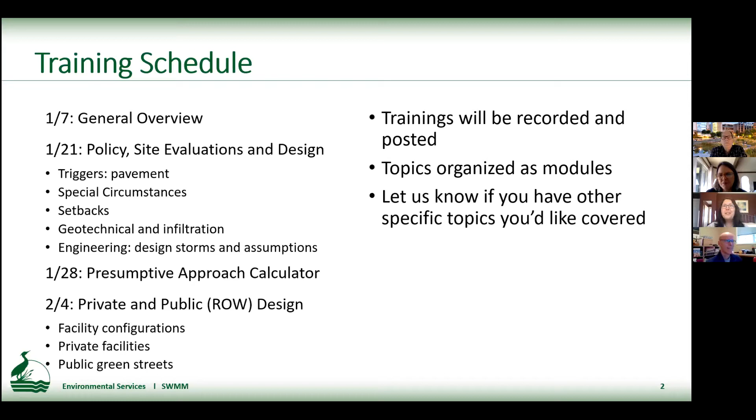All right. Now I'm going to dive into the schedule. So the manual was released on December 14th. And just as a reminder, the source control manual was also posted on that day. I want to acknowledge that the deployment of the presumptive approach calculator is delayed. And so whenever that's available, we're going to extend the grace period for when both manuals overlap based on that availability date.

And then the way we're going to apply the manual. During that 3-month grace period, either manual can be used. Land use reviews will be conducted under the manual in place at the time of submittal of a complete application. Building permits will be reviewed based on the permit intake date. Public works projects will be reviewed based on the date the concept development submittal is accepted for review. And city capital and interagency projects will be reviewed based on a 60% plan submittal date.

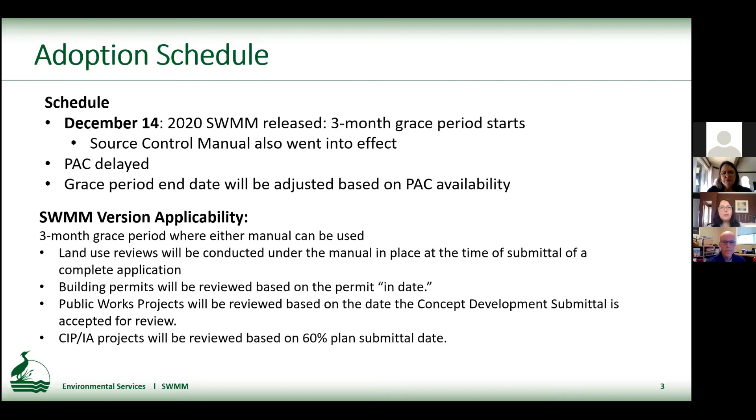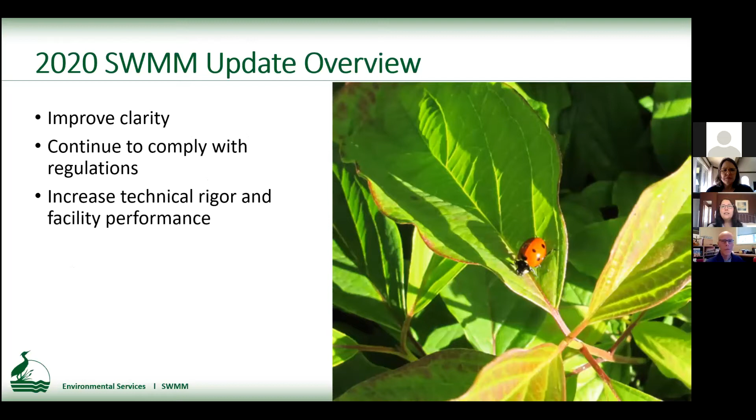Now I'm going to dive into the overview. This manual update we've done to improve clarity, to continue to comply with our regulations, and to increase the technical rigor and our facility performance. Quick reminder, with the SWMM we require stormwater management for development activities that construct or alter impervious area. And we also protect drainageways on private property. We have these requirements to comply with our broader environmental regulatory requirements, to protect watershed health, and to meet our stormwater system needs.

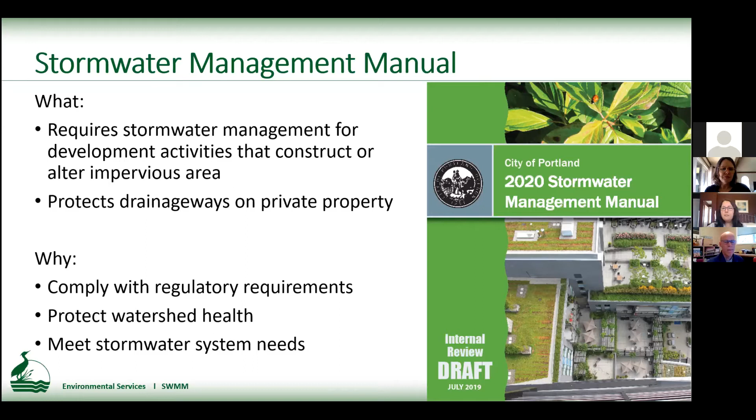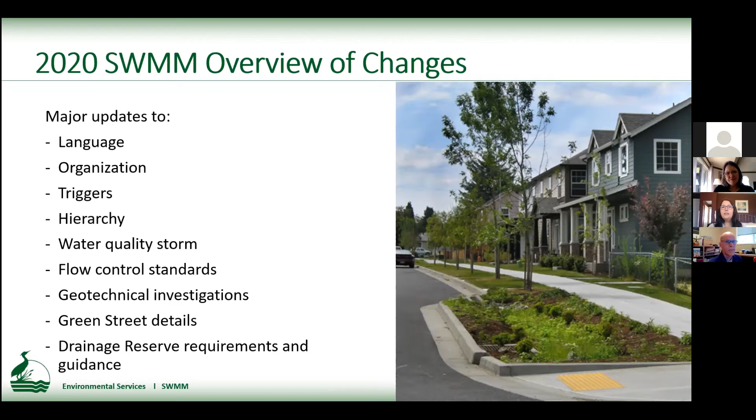So this was a completely comprehensive rewrite. There's been major updates to many elements of the manual, including the language, the organization, the triggers, the hierarchy, the water quality storm, our flow control standards, requirements and guidance for geotechnical investigations, a full redo of the Green Street details, and a reorganization of the drainage reserve requirements and guidance. We have a new table of contents. This has been arranged to better align with users and how you would approach the manual.

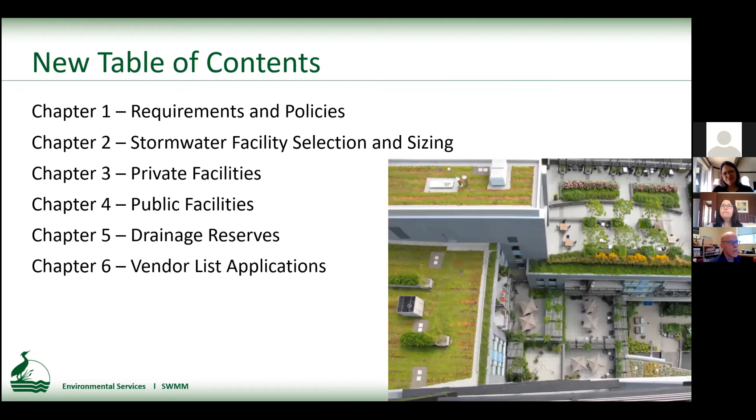So I'm going to start with chapter 1 here, which covers requirements and applicability. Okay, so our pavement triggers, some of them have changed and some of them are staying the same. We still have the 500 square foot threshold for creation of new and redevelopment of existing impervious area. We have exemptions for pavement maintenance or repair, utility trenching, and base repair of public streets when it's less than 50%.

The big thing that we've changed is our new definition of what counts as maintenance, and it allows exposure of the underlying gravel. We consider it replacement or redevelopment if that underlying soil is exposed. And this allows for replacement of concrete to be considered maintenance, because prior to that, really only grind and overlay qualified.

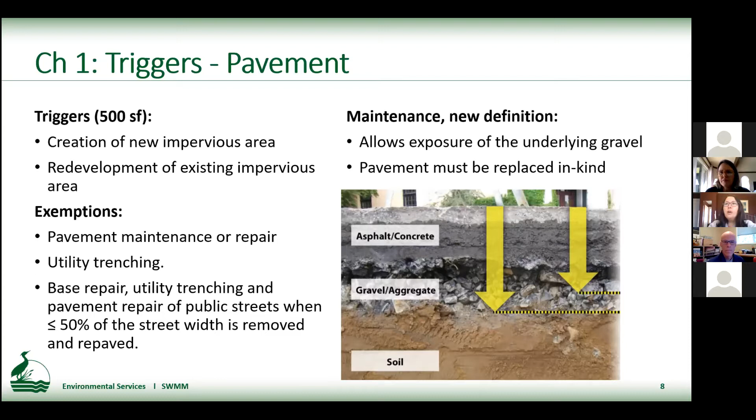The major changes in our exemptions for pavement work is we're removing some exemptions, including the blanket exemptions for sidewalk and ADA only projects. Those are now going to trigger unless it's considered maintenance. However, these projects will be eligible to pay the special circumstances fee using our new staff review special circumstance process, and that doesn't require additional design justification.

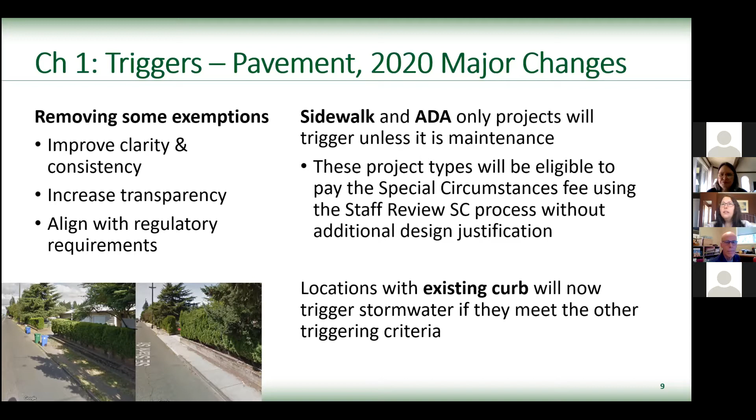Locations with existing curb will now trigger stormwater if they meet the other triggering criteria, so we're also not using that rule anymore. We've changed the hierarchy where we've separated out the selection of the facility from the selection of the discharge point, and we've collapsed some of our discharge points.

So now we have level 1, which is on-site infiltration, and that just really specifies that the primary goal of the manual is to infiltrate as much on-site as possible. That can be with a surface facility or UIC. We have an exception for sites that construct a qualifying eco-roof.

Level 2 is now the offsite discharge to a storm-only system, and level 3 is offsite discharge to the combined system. So there's that decision point, and then a separate decision point is the facility type that you select, and we continue to prioritize infiltration vegetated facilities, to acknowledge the benefits of those systems.

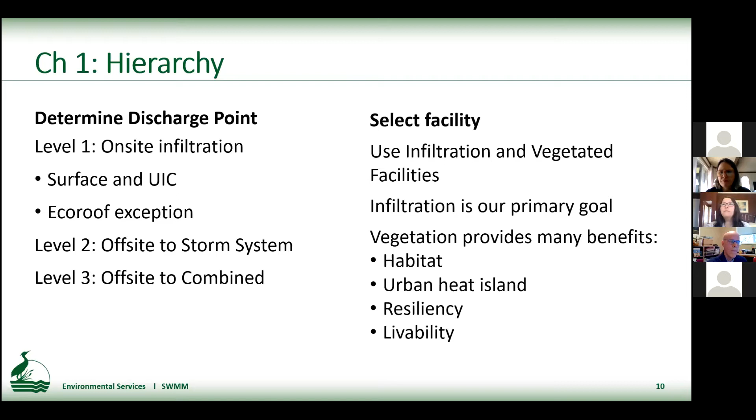We made a fair number of changes to engineering and design assumptions that will impact facility sizing. We're increasing the water quality design storm. We've changed some flow control standards. We've changed some engineering assumptions that impact facility sizing, including the infiltration rate of the growing medium and setting pre-development curve numbers. In aggregate, these changes mostly impact the size for fully lined vegetated facilities and facilities with under drains that are designed using the PAC. Overall, there are minimal changes to simplified approach facilities.

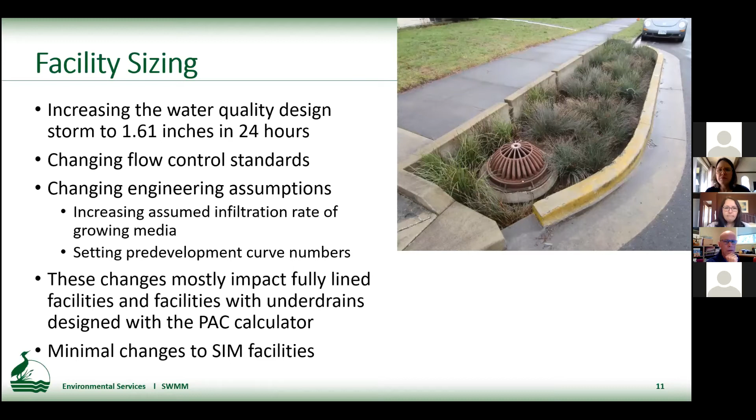Hey, Adrian, we're still getting some fading. People are reporting fading. Maybe could you speak up a little bit? I don't know if it has to do with how loud you are. Okay.

So when you add all these things up, here's a summary of how they impact facility sizes throughout the city, depending on what their design goals are. The largest impacts are to facilities in the separated system, the water quality only facilities, and facilities providing flow control and water quality in the separated area. Those get a little bit bigger. Facilities in the combined system and in areas that have on-site infiltration will likely get smaller.

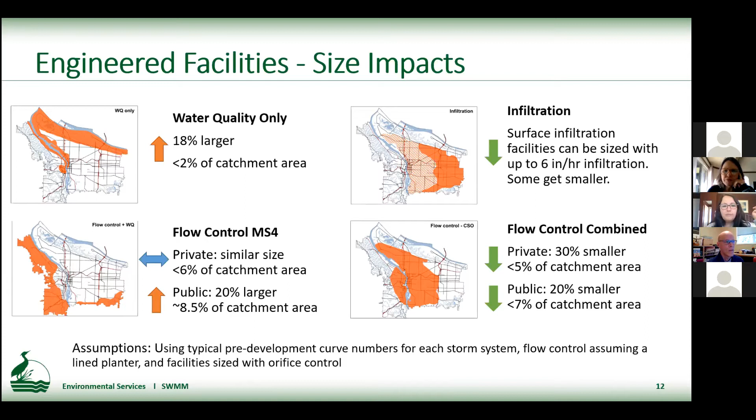Is that a little bit better? Yeah. Okay.

So chapter 2 covers facility selection and sizing. It starts with selecting your design approach and discusses the applicability of the simplified, presumptive, and performance approaches, and provides more specific lists for which projects can use which design approach.

And then we have more details on site evaluation, including looking at the location of your site, the setbacks required, and geotechnical and subsurface investigations, including infiltration testing and thinking about things like landslide hazards. And then there's a whole section on facility selection, sizing, and design.

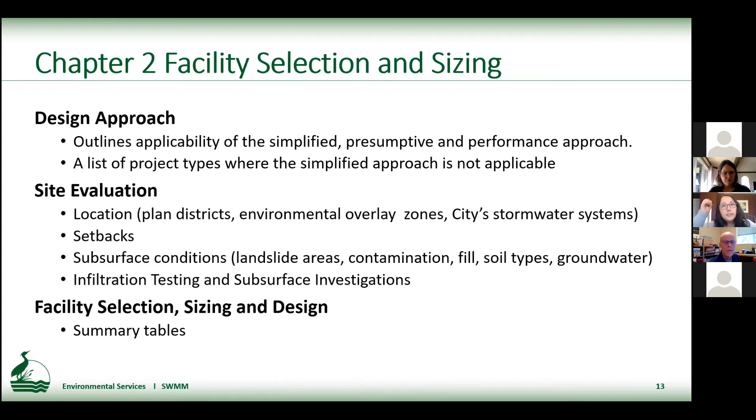We've done a complete review from a geotechnical perspective, and from that have provided additional guidance and requirements for geotechnical investigations, groundwater investigations and infiltration testing. We're asking for more information on bore logs when they're done. We've added a little more guidance around depth to groundwater measurements when that's required, and we've reduced the amount of time needed to do those investigations.

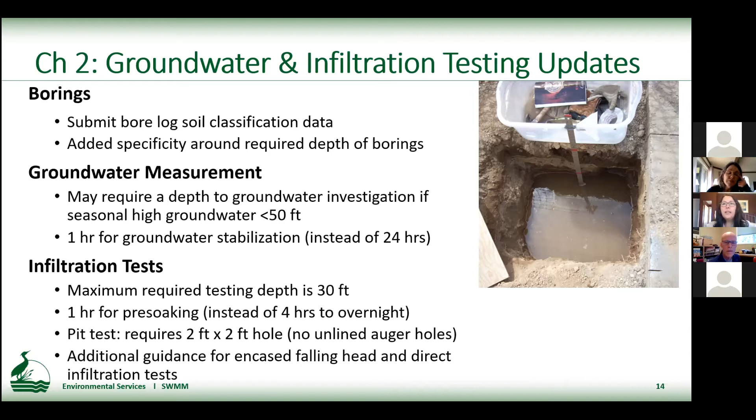We've also provided a lot more information around infiltration tests. We're setting the maximum required testing depth at 30 feet. Sites can still go deeper than that, but that's as deep as BES will require. We've reduced the requirement for the pre-soaking time. We've specified the size of the pit required for the pit test, and we've provided additional specific guidance for encased falling head and direct infiltration tests.

We've added more guidance for sites that want to infiltrate into fill or onto sites that have contamination. Generally, BES's perspective is that we prefer to not infiltrate in these situations, but we've provided guidance for sites that would like to justify infiltration in these conditions.

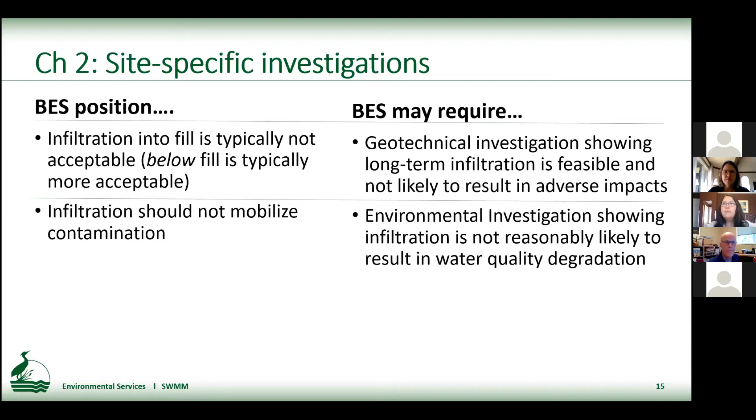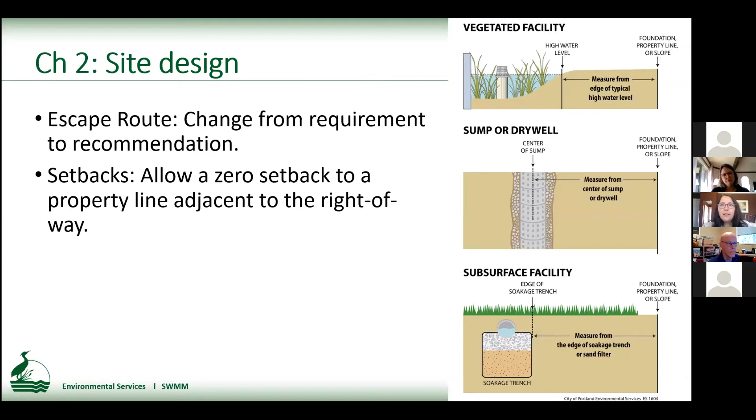We've made a couple changes to site design requirements. The escape route is now a recommendation instead of a requirement. And we've changed the setbacks to allow a 0 setback to the property line adjacent to the right-of-way. We've incorporated all of these changes into a full update of the PAC calculator, and that is pending. We are furiously working on getting that ready, so hopefully we'll have that out in the next couple weeks.

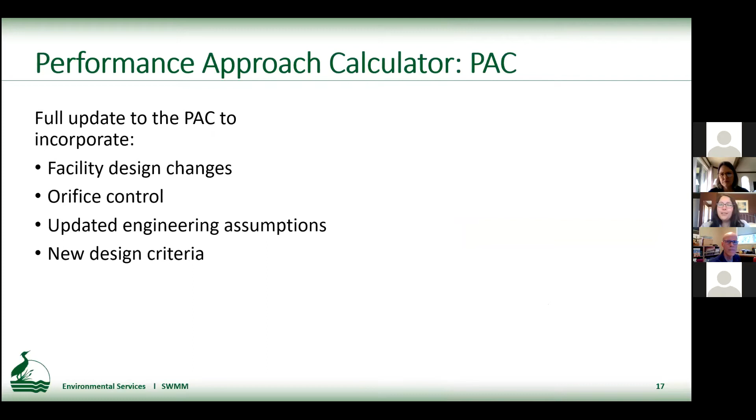All right, good. Henry, you're up. Hopefully your internet will be better.

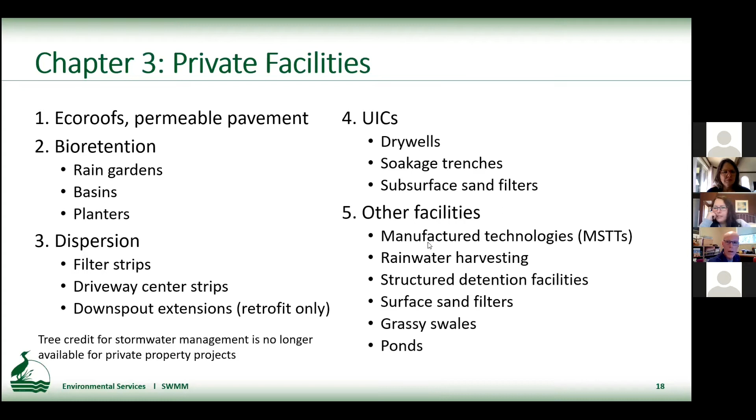There we go. Sorry. For eco-roofs, the biggest changes are really due to the appearance a couple of years ago of the Central City 2035 eco-roof requirements. And that's resulted in updated language concerning planning and zoning requirements. There's new guidance for sizing eco-roofs that cover just part of the roof. Eco-roofs covering at least 60% of the roof are exempt from infiltration testing requirements. It's also called the eco-roof exception. And for the first time, the manual has some additional language about systems that have more than 6 inches of media, though 4-inch depth is still the standard for eco-roofs.

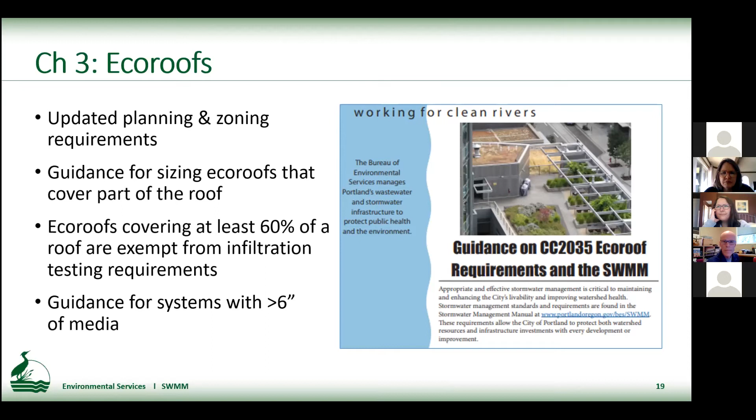For basins and planters, the biggest changes: we now, for all systems with underdrains, including basins and planters, require 24 inches of blended soil. That's to increase the stormwater retention, but also the water available to plants in the summer in those systems with underdrains. This also includes systems with rock galleries. And for simple infiltration systems where our blended soil is imported and placed on top of native soil, the maximum allowable depth of imported soil is now 12 inches to allow the plant roots to get down into the native soils, again, for summer plant health.

Swales have been removed as a separate facility type. There's been confusion over the years. The cross-section for bioretention swales, distinct from grassy swales, has been confused with the cross-section for basins because they're so similar. So if you're looking for design criteria for bioretention swales, it's been incorporated into the basin section.

Lined basins aren't allowed anymore under the SIM because we've had so many problems with implementation, including design and construction issues for these systems when they're done by non-professionals, dealing with those pesky issues about properly installing liners. Those are the main changes.

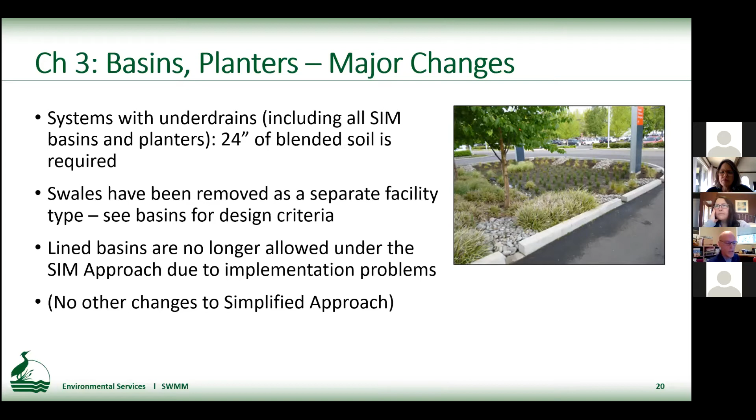Oops. Trying to get the hang of this.

A major change, there's a big change to the standard underdrain configuration that's required for presumptive and performance approaches. Any of you who used our 2016 manual know that the standard underdrain, including the rock gallery encasing the underdrain, extended the full length and breadth of the facility. The new design calls for a substantially shortened underdrain, and the PAC will spit out the dimensions for you. It's a standard slotted underdrain. It's a well casing material that's commonly available. No longer will whoever's constructing it have to actually drill holes in the pipe.

There's a single aggregate surrounding the underdrain pipe instead of the 2-layer system, which was standard before. That's quarter-inch to number 10 angular aggregate that's commonly available. It's what we use to sand the streets in the winter. Again, the shortened underdrain length. And a lot of this is about increasing the soil volume, the retention, and improved summertime plant health.

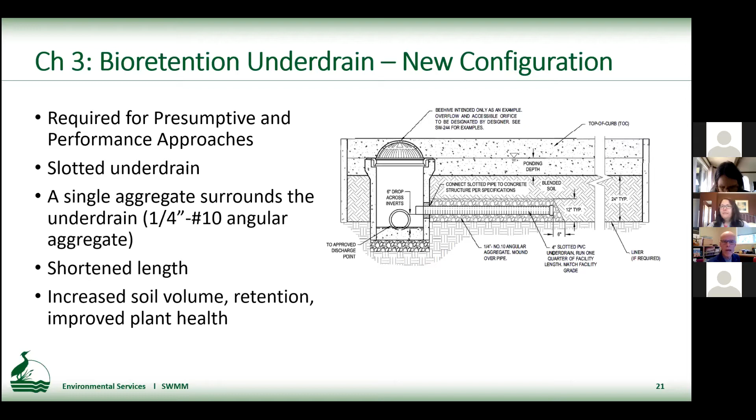And this has been years in the making. We installed a significant pilot project a couple of years ago that we're still monitoring. And we built this on top of the experience of the city of Seattle, which has used a similar system for over a decade.

We have a new requirement for orifice controls to control the discharge from bioretention facilities. And we're among a number of cities that are either investigating this or doing it, including Gresham and some other cities in Oregon. So orifice controls, which are typically just a small round hole, often drilled in the cap for an underdrain, are going to be required for most presumptive and performance approaches, with a new minimum orifice size of

3/8 of an inch, if, for instance, it's on the end of an underdrain and all the flow passing through the orifice is effectively filtered. There's no change in the minimum size of orifices if they're taking some flow that isn't filtered, say in a large storm overflow. The minimum size is still 1 inch, and with some protection such as screening required.

Of course, for these new small orifices, access is key for visual observations and for maintenance. The SWMM provides some configuration suggestions, but the responsibility for coming up with an accessible, maintainable system, a useful configuration, is squarely on the shoulders of the designer.

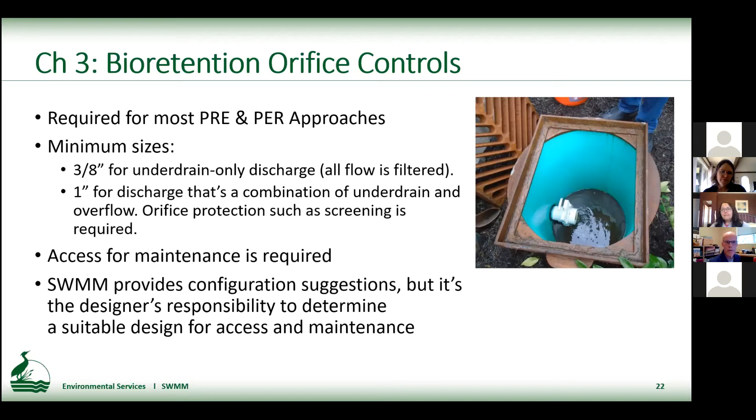A couple of new facility types: driveway center strips, I mentioned those already, but they're allowed in all soil types with different covers, including grass and gravel. We're hoping that they'll be more widely used with the improvements in the additional criteria. Surface sand filters, I mentioned them previously, they're for very limited use, only with approval by BES, and they do have an almost identical cross-section to a regular planter.

A couple of new details there on the right. At the request of designers over time, there's a new simple check dam detail, and there's a new flow dissipator detail. Again, it's voluntary but recommended in larger facilities to spread the flows when they enter the facility. That's what the flow dissipator is.

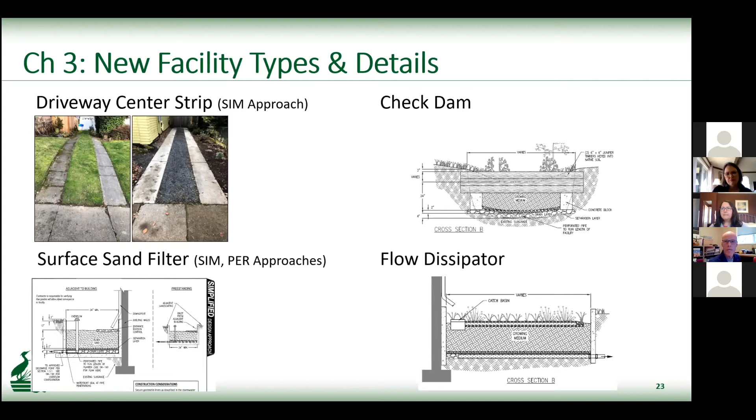Filter strips. Sheet flow is everything in these for distributing and dispersing the flows. The technical basis has really been gone through from top to bottom in an attempt to better ground these, but also allow their use more widely. So filter strips are allowed under the SIM and the performance approaches. Applicability has been expanded to contributing areas larger than 500 square feet. There's sizing that allows them in all soil types.

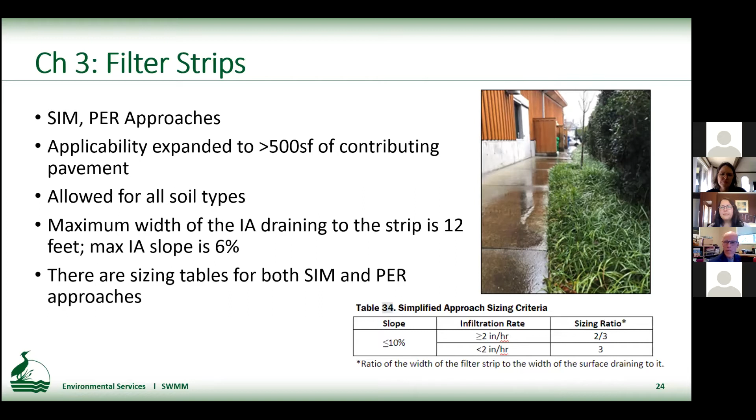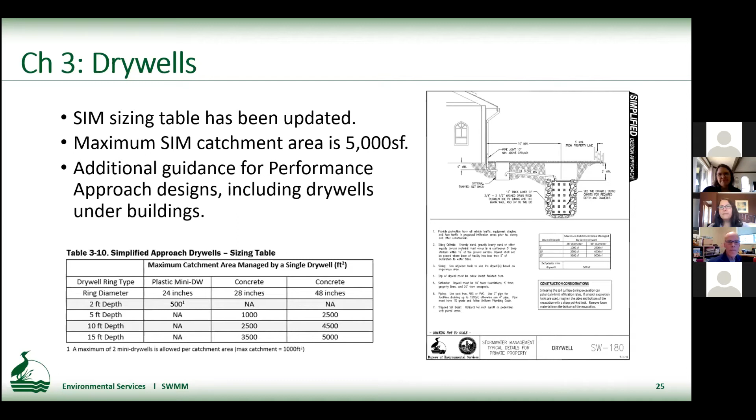And finally, for the first time, we have post-construction testing for dry wells. So this would be, for instance, in a case where the design initially calls for more than one dry well at a location, and a designer opts to test a first dry well to figure out whether the additional dry wells are needed, or whether the installed dry well actually performs better than the initial small-scale tests indicated. It's important to note BES also will require this kind of testing if setback requirements aren't met.

So the criteria cover things like the minimum duration of the test and the type of the test. You can do a standing head test or drawdown test. It covers the safety factor, and then it covers the all-important extent to which you can extrapolate the results of the post-construction test to the performance of the larger dry well.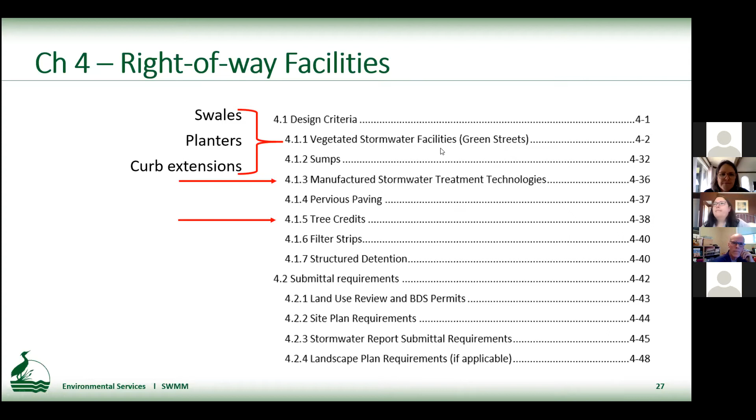So the organization for the vegetated facility section has a new subsection for site design guidance that reflects the best practices that PBOT and BES have been using over the years. And this includes new sections for guidance on site coordination for future development, tree coordination, utility coordination. All of the curb extension specific and planting strip specific information is organized into respective sections. And that includes information for maximum and minimum lengths and widths for those two facility types.

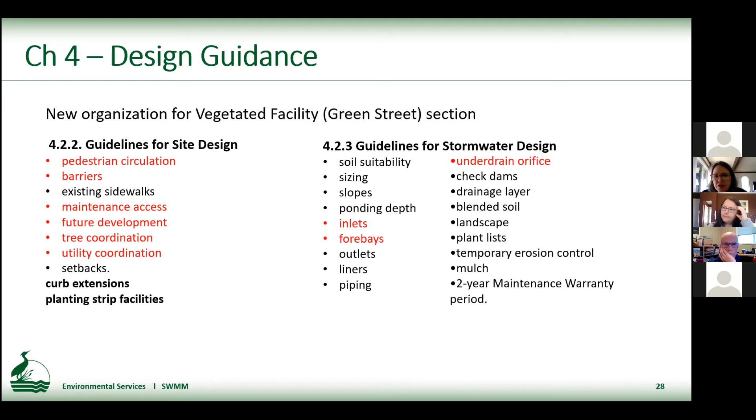There is the section for guidelines for stormwater design. And this section has new information, including how to measure ponding depth, new inlet and forebay requirements, and the new underdrain configuration specifications that Henry mentioned. Next slide.

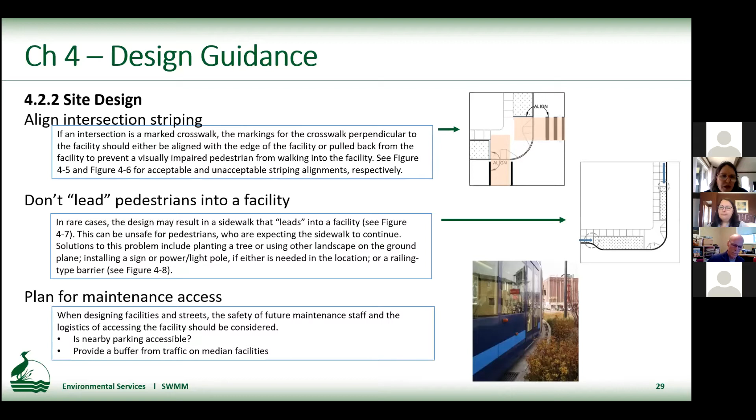The new site design guidance section adds more guidance for pedestrian circulation around curb ramps and sidewalks, including when a barrier might be needed for pedestrian safety. There are new maintenance access suggestions to address safety of the maintenance workers. And all of these guidelines are intended to improve safety for pedestrians, and in particular, the visually impaired, and also safety for vehicles and maintenance staff. Next slide.

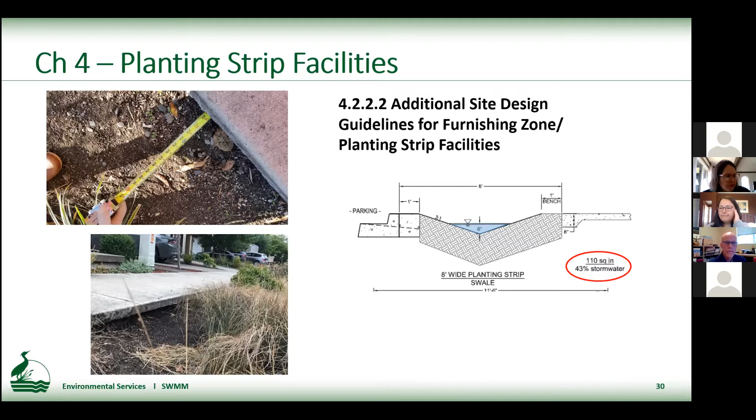So a big change that maybe some people have heard about is with the swale type configuration, side slope configuration. BES has found that facilities with side slopes have maintenance challenges, including plant mortality on those slopes and soil migration leading to undermined sidewalks. Additionally, the configuration is not a very efficient use of the right-of-way for stormwater management. Not very much of the footprint is actually used for stormwater management. Next slide.

So for a facility with side slopes, there is a new requirement for a 2-foot flat bottom at the bottom of the facility and a thickened curb and sidewalk detail where the slope meets the sidewalk. So when the ponding depth of the facility is 9 inches, this configuration would require an 11-foot, 6-inch wide planting strip. So there's not a whole lot of places where this configuration probably applies. However, there are 4 options to use that are still very acceptable for an 8-foot wide planting strip.

There is the most common and popular solution, the swaleter, and then there's the efficient planter that can be used at corners where parking removal might be preferred by PBOT for sightline issues. And then you could also use the planter with the 3 foot wide step out zone where parking is needed. So there is not an expectation that additional right of way dedication will be needed for this change. The intention is that the facility design would change, not the right of way dedication. Next slide.

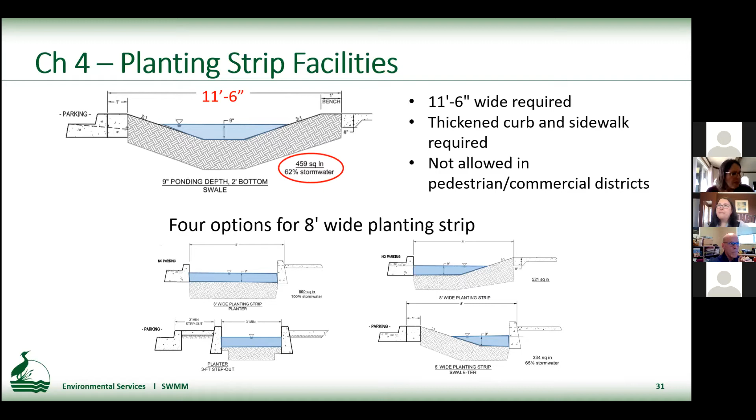So for facilities in the planting strip, there's more detailed requirements for inlets, and we found that water making that 90-degree turn often bypasses the inlet. So these inlet tables are intended to make sure that the water gets into the facilities more efficiently. There are 3 tables in Chapter 4 to use for deciding how many inlets your facility needs. And with the tables, first you determine your design storm that you're designing to, and then catchment area and slope.

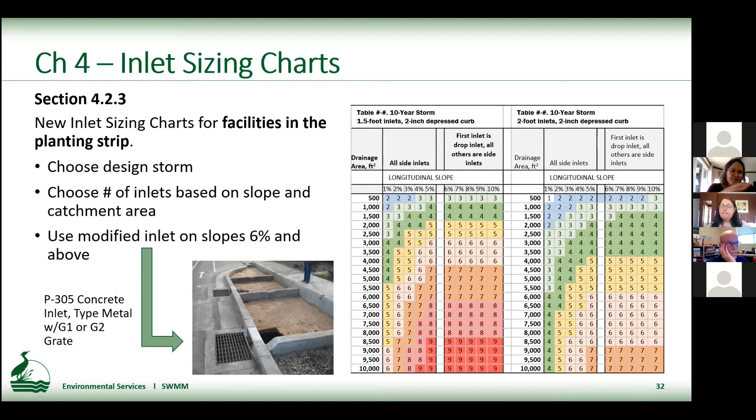And when above 6% slope, there's a requirement to use the new detail, the concrete inlet type metal with G1 or G2 grate. It's pictured on the slide, and that allows for the water to not only turn into the facility, but also to drop into the grate and then go into the facility. There are also some new inlet requirements for curb extensions, some guidance. There's not tables, it's not as detailed as the planter or planting strip facility. Next slide.

So a couple other inlet changes. The inlet for the curb extension, which is now detail P301, has been modified so that the metal inlet is perpendicular to the curb rather than at an angle. There's a new detail P306, the notched forebay wall for curb extensions. I see I have a typo there. And that is for use on streets with high sediment. And there's a list in Chapter 4 about what street classifications this will be used on. There's a companion detail SW310 that is the planter version of the notched forebay. Next slide.

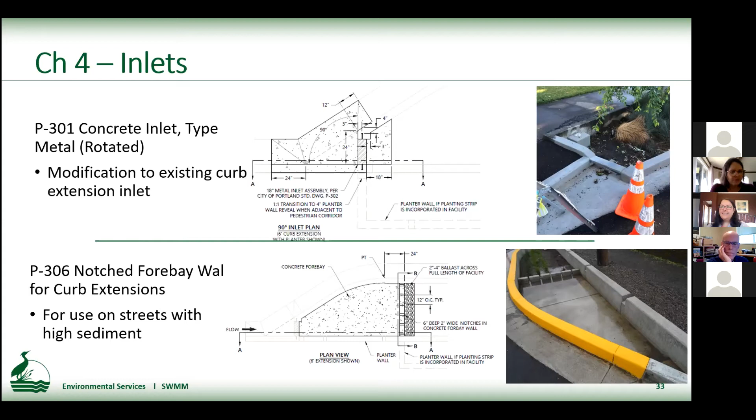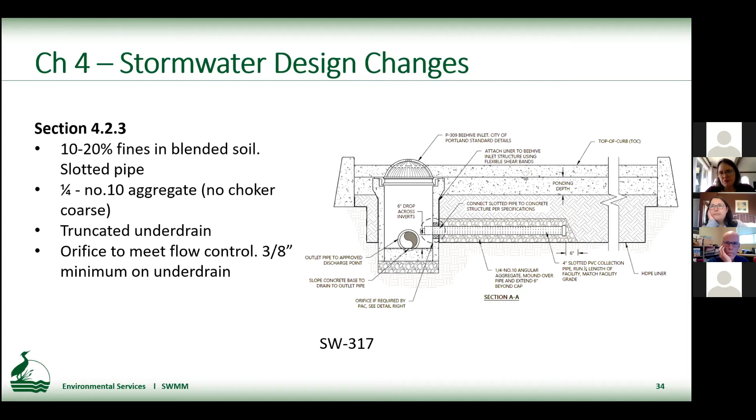I'm not going to get into detail on these underdrain configuration changes because Henry spoke about them, and the changes he talked about, the orifice, the change to the aggregate and to the pipe also apply in the right of way. So I don't think there's anything different than what he mentioned in his slides that would have changed for the right of way. Next slide.

So due to construction and maintenance problems, we don't have the wood check dam detail anymore. We are moving to just concrete check dams. There's been an evolution in check dams over the years, and this is where we've landed for various reasons. There are new details included for the check dams that correspond with the different configurations. So if you have a rock gallery, or if you have a lined facility with a slotted underdrain discharge. So there are new details to correspond because there had been a lot of guessing about what to do with check dams over the years. Next slide.

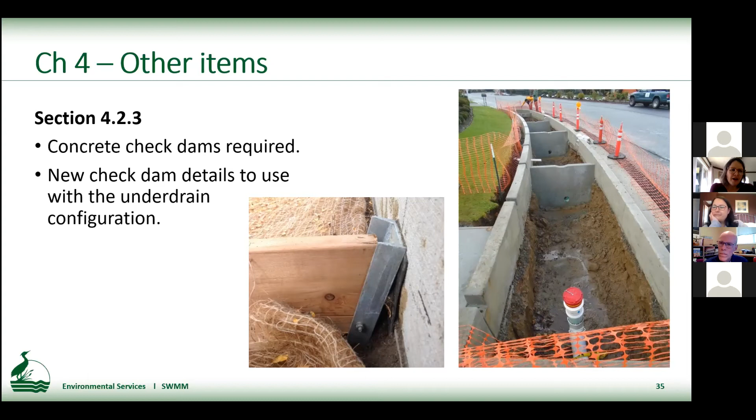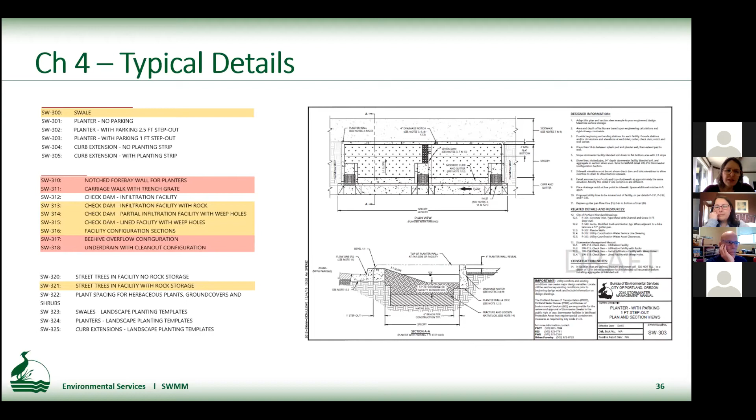Next slide, please. And then in training number 4 on February 4th, where Henry and I will talk more about private facilities and public facilities, I'll get into a little bit more detail about all of the changes that have been made to the details.

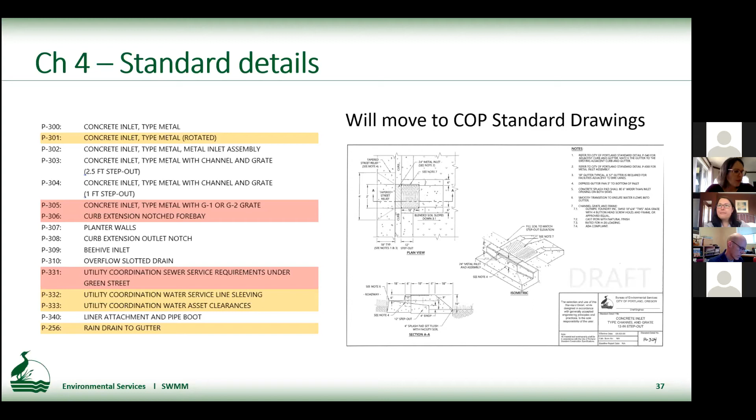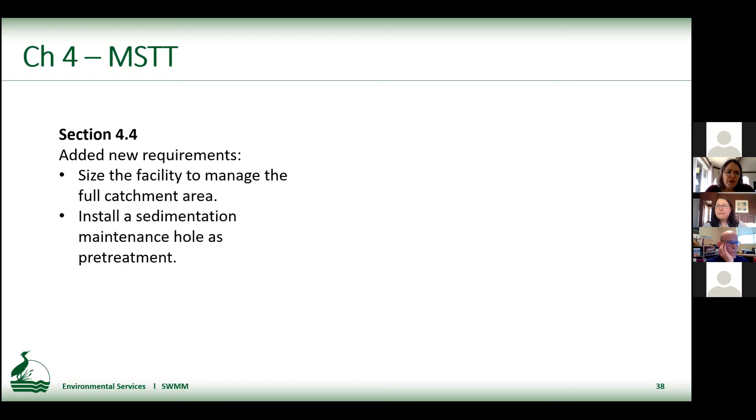So for MSTTs, not any big changes there. We've clarified the requirement to size them to manage the full catchment area and to install a sedimentation maintenance hole as pre-treatment. And this is just to standardize maintenance and design practices across the Bureau. And then next slide. And my last slide about tree credits.

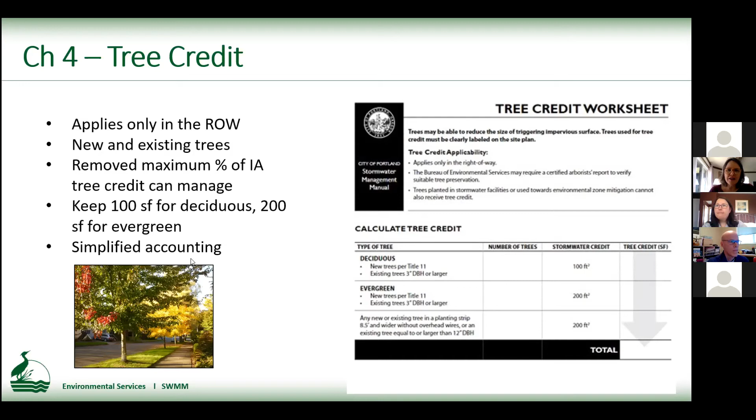I will stop. Well. Do you want me to request control, Adrian? Yeah, I think. That worked. That's so weird. Okay, good. I think you have control, Alice. Okay, we'll see how it goes.

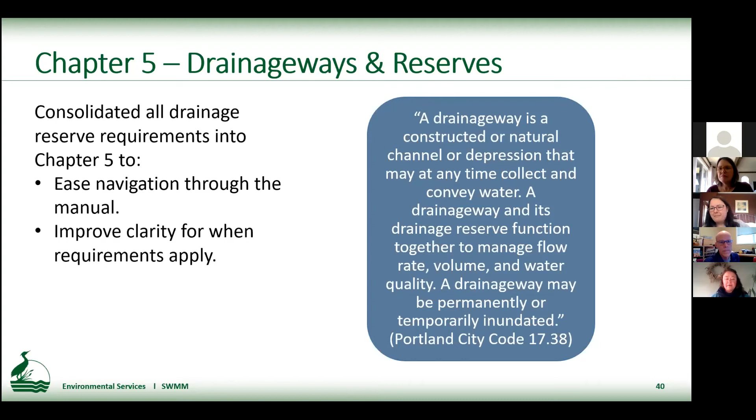Okay. Hi, my name is Alice Coker, and I'm here to talk to you a little bit about drainage reserve requirements in the 2020 SWMM. These are not new requirements. They've actually been around for quite some time. We've done a lot of work to try and clarify these existing requirements, but most notably, what you'll notice is that we've consolidated them all now into one chapter, chapter 5, where previously in the 2016 SWMM, they were scattered throughout the manual.

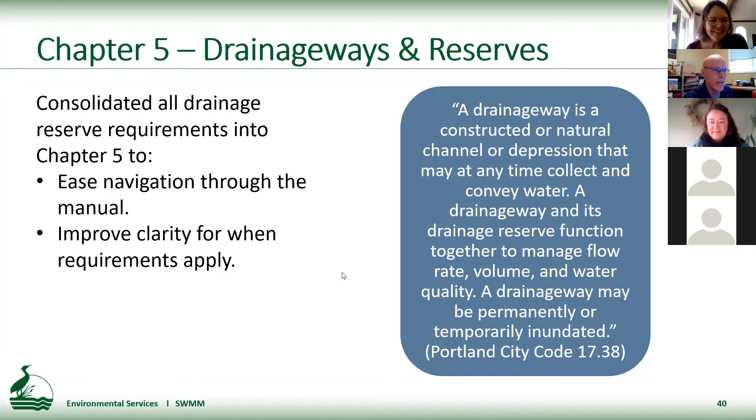Let's see if this works. Okay. Well, I don't know, maybe not. Well, maybe did she leave? Okay. No, I'm here. Did it go? Okay. Oh, there it goes. Oops. There we go. All right. I think I have control now. Let me try. Hold on. Yes. Okay, I got it.

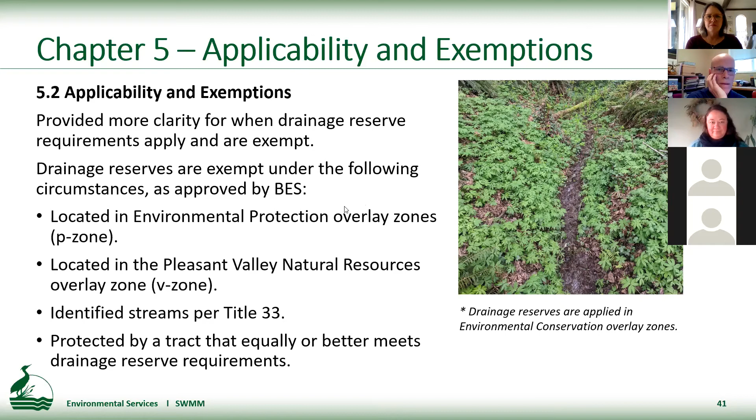Well, I did have it. No, you're kidding. That's so weird. Well, I don't know what to say. Perhaps Adrian, do you mind just, oops.

Maybe she's not here. Okay, we're at the next slide. Allowable activities. So allowable activities or encroachments. We've added this section to help clarify when it's now allowable to do certain things in drainage reserves that have a relatively low impact. And this will no longer require a full review.

Previously in the 2016 SWMM, we had 3 of these that are listed available. For example, the construction of soft surface trails, maintenance and repair of culverts and water crossing structures, and installation of single outfalls of 4 inches or smaller. But now with this manual, we've expanded that list of activities to include all of these.

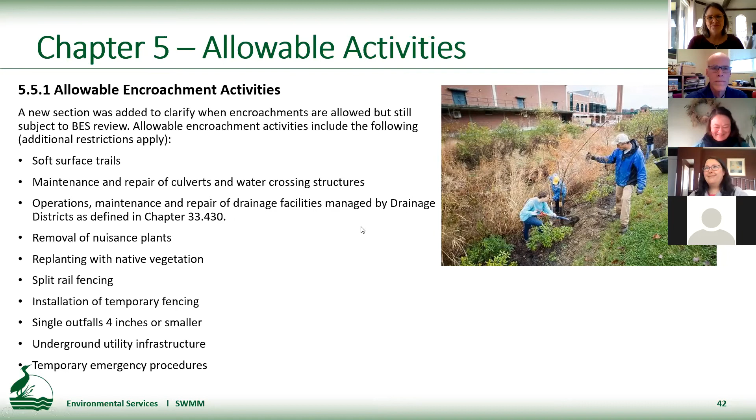Alice, you just want me to do it? Yes, please. Thank you. I don't know what's going on. Okay, thanks.

We've clarified our mitigation requirements for drainage reserves. So mitigation requirements kick in if there is an encroachment into the reserve. And previously we were silent on what the mitigation practice was. Now we've clarified that permanent disturbances mitigate at a ratio of 1.5 to 1, whereas temporary disturbances mitigate at a ratio of 1 to 1.

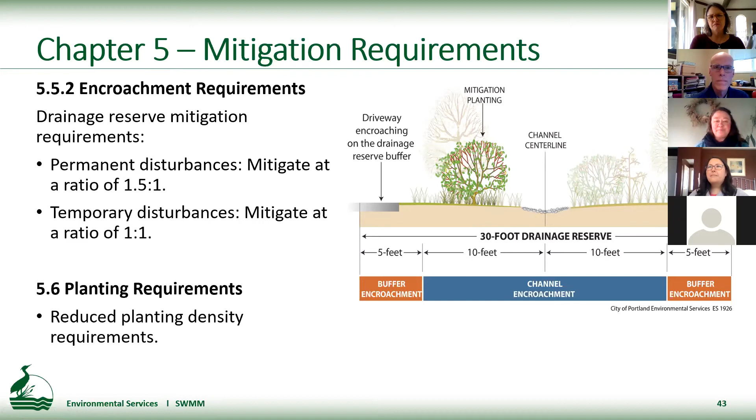We've also clarified our planting densities based on feedback that we received through the public review process and the internal review process. So now planting densities are reduced to better match practices in restoration plantings. Okay, next slide, please.

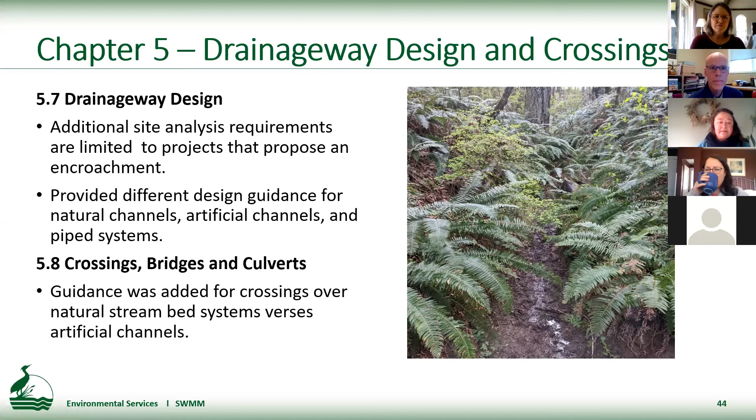Okay, we've improved our design criteria. Site analysis or design criteria requirements apply to projects that propose to alter or move a drainage way. And the level of analysis required is based now on the complexity of the project, the proposed impacts and the potential risks and channel size. We've also added a new section that has some guidance for crossings, bridges, and culverts. Next slide.

We've improved our submittal requirements, and these are now also better tailored to the level of impact to the drainage reserve. These include both engineering analysis and survey requirements. So now survey requirements are based on the location of the disturbance to the drainage reserve, and survey requirements are reduced when the impact to the reserve is relatively low.

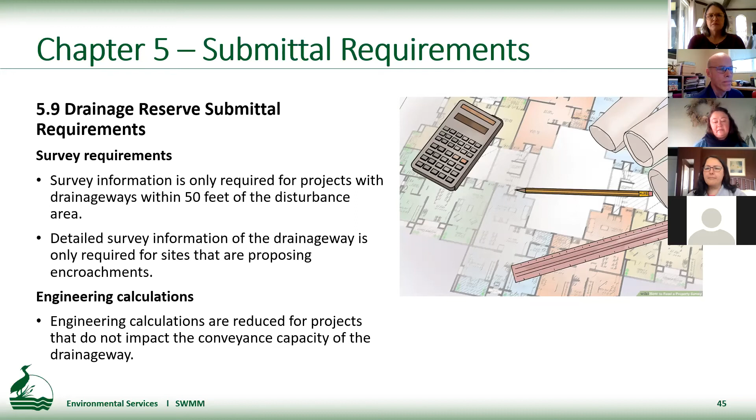And similar to the engineering calculations, less hydraulic analysis is now required when the disturbance in the reserve is temporary, does not adversely impact the existing grading, and does not result in the construction of a new channel. Next slide.

This is a new form that we've added, and it's for recording onto the property with the county when a drainage reserve exists. Previously in the 2016 SWMM, we were using an operations and maintenance form to record with the county. In some circumstances, we identify a drainage reserve and place it. However, there's not necessarily any construction happening on the drainage way or within that reserve.

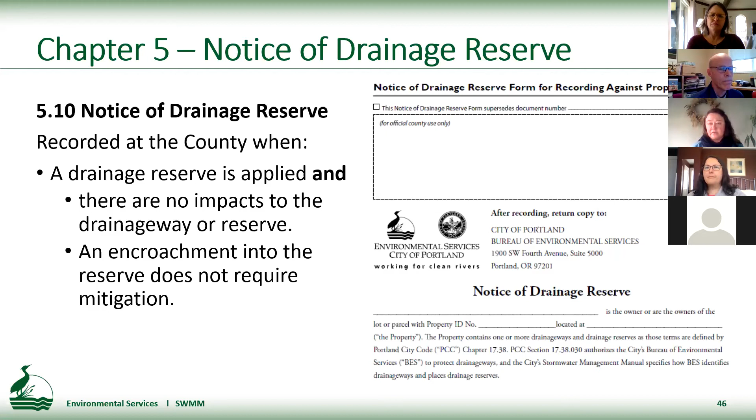And so it didn't make sense to record an O&M against the property since no maintenance or planting activity was occurring at that time. So we've created this new form that seems more appropriate for acknowledging that the drainage reserve exists. However, there's no maintenance requirement until an encroachment occurs. Okay, I think that's it. Next slide, I think it's Henry. Thank you.

All right, thanks. So chapter 6 has our vendor list submittal requirements. We've grouped together application requirements for manufactured stormwater treatment devices. We call them MSTTs. Different jurisdictions call them a lot of things, but StormFilter would be one of the examples. Also, application requirements to be a vendor of our blended soil for stormwater facilities.

So for the MSTTs, there's a link, of course, to the list of approved devices that's online, and that's what people usually consult. The list of approved devices is on our SWMM website. You should be able to find it easily. And the approvals contain use conditions that go along with the approval. So there are some significant updates to the requirements for people applying for BES approval for a water quality treatment device in the city of Portland.

And there's more detail about BES's decision-making criteria and those conditions of use, including a new requirement for more field documentation of O&M requirements. Many of you may be aware that there's a proliferation of these devices, with companies coming forward with new devices for review under the Washington TAPE Protocol, which often head our way afterwards for approval in the city of Portland.

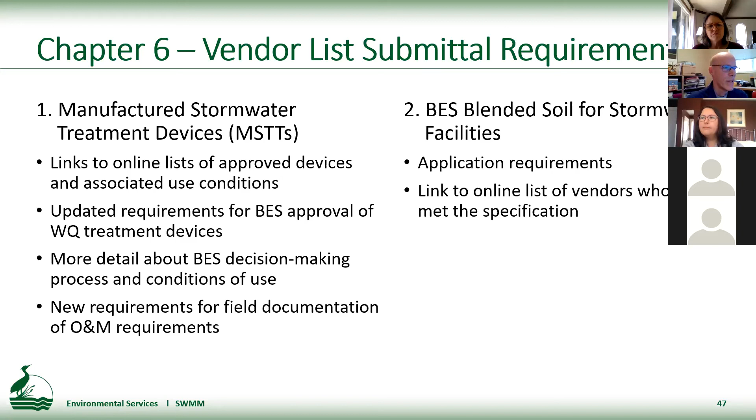Okay, I think our last slide is next. Oh, we have, sorry, definitions and appendices.

This section contains the updated definitions. I think there are a fair number of updated definitions. Hopefully they're more useful. They're aligned with the Sewer and Drainage Facilities Design Manual and Code 17.38. Appendix A, the Stormwater Design Appendix, has been updated to match engineering changes, including the new PAC methodology.

Appendix B covers culverts and outfalls. No big changes there. And Appendix C, resources and references, has been substantially updated with revised links.

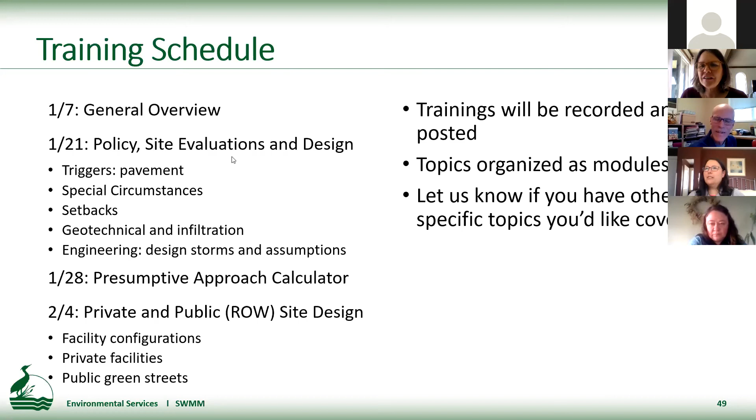All right, well, we'll give it a couple minutes if people just want to say hi at all. I'm gonna stop my screen share now. And we don't have any more content, so if people are... oh, Tom's raised his hand, unless he forgot to put it down from his testing earlier. And there are a couple questions now in the chat. Okay, great. So how do you want to do this? Raise hand or just put questions in the chat? Either one, whatever you prefer. Okay.

Should we start with Fred's question? Henry, I'm gonna let you moderate it. My question is, will the City of Portland special provisions or the standard specs be updated to reflect the SWMM changes? I do a lot of public projects, and sometimes I get comments like, oh, the soil's changed, but there's no special provision created, as an example.

I can answer the particular question about the soil spec. The Red Book is being updated. But Fred, presumably you have access to our special specs that would give you the latest, even before the Red Book is updated? Is there coordination with the special provisions? Typically that would be brought into the special provisions and then everybody's got the latest. But if not, you're saying to go directly to BES to get the latest spec language? I think that's right. Okay.

And then of course, other terminologies for some of the planters along the side of the road. The specs have language with current terminologies, but it sounds like you're creating some new facility types. Will that be reflected in the special specs, city standard specs and the like? Yeah, Ivy, do you want to answer that? Sorry, I was focusing on my poll because it's all flashy things. But I think the question was about the right-of-way specifications being reflected in the COP. Correct. What we call the Red Book.